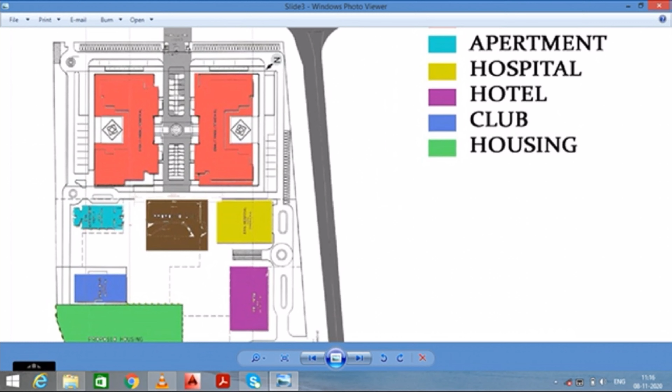All the people want some recreational space near the workplace, so they can break the monotony of work. People can go inside and enjoy, and this auditorium can host drama, dance, and many other activities. So this is the context of the site.

This is how you can show your key plan, and this is a good presentation way to show the key plan of your site as well.

So you can show your presentation like this. Let's go to the next page.

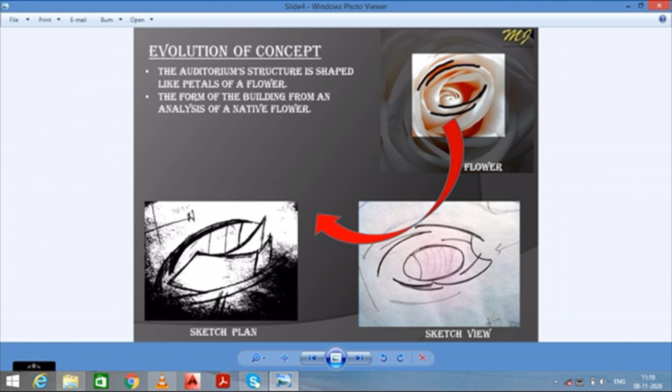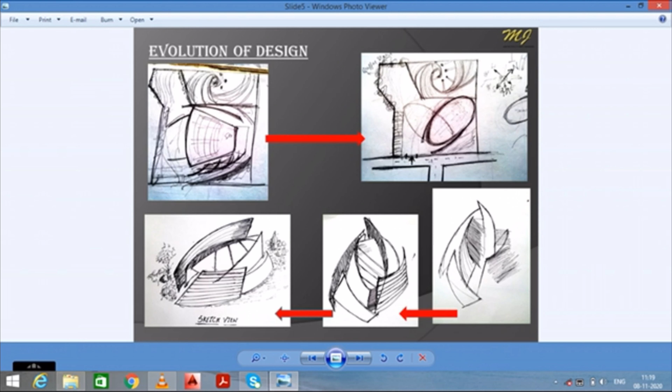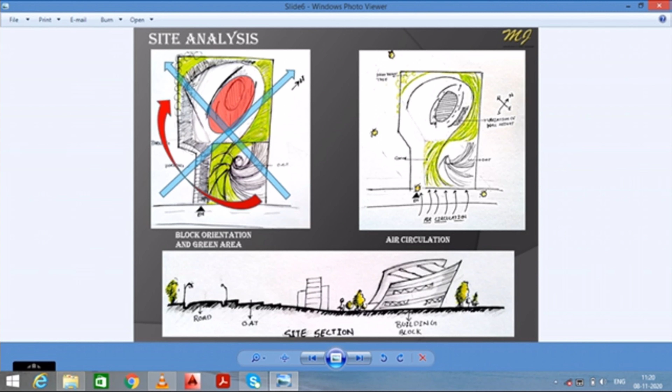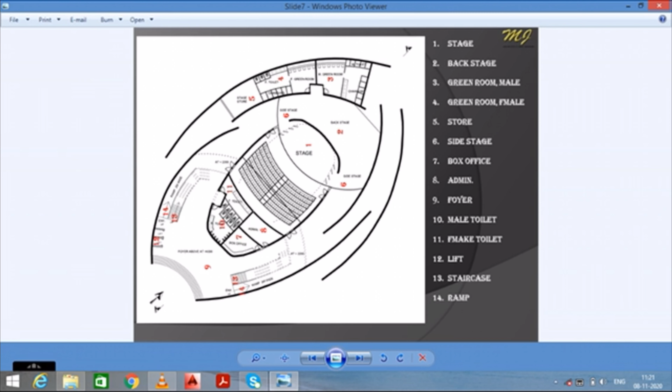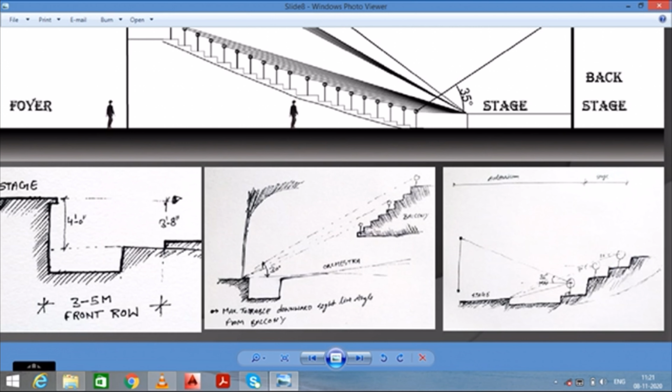So this was my initial presentation that I have done, but the final presentation that I have made, this is the final presentation that I have made basically.

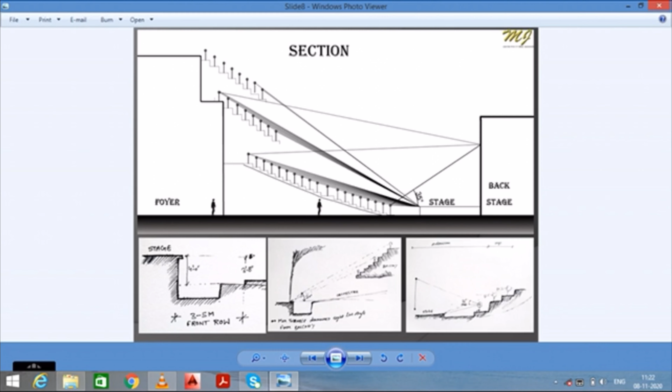So the composition, you can see the composition that I have done. You can take the reference from that, it will help you in your design problem.

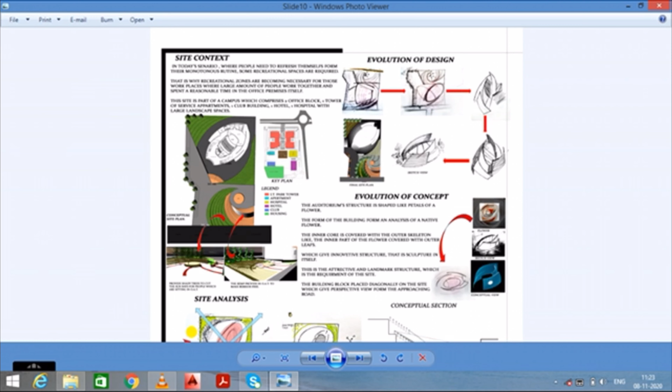So this is basically zone one, where I have put site context with the key plan, site plan, and 2 views. And this is the second zone, evolution of design. So I have kept all my sketches there, and this was the evolution of concept, showing how all these sketches evolve. I have also written some text there, so that you get some clarity.

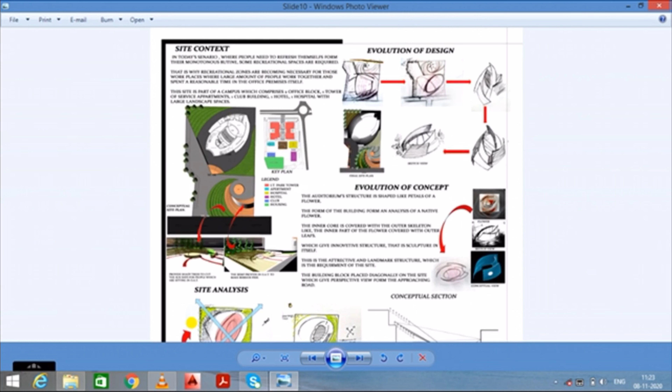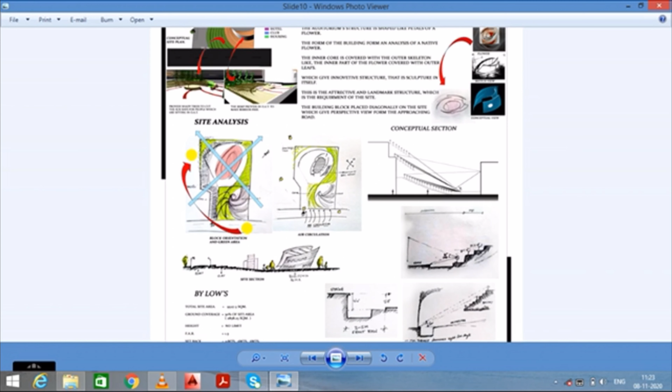So you can see in this photo. So this is the site plan that I have done.

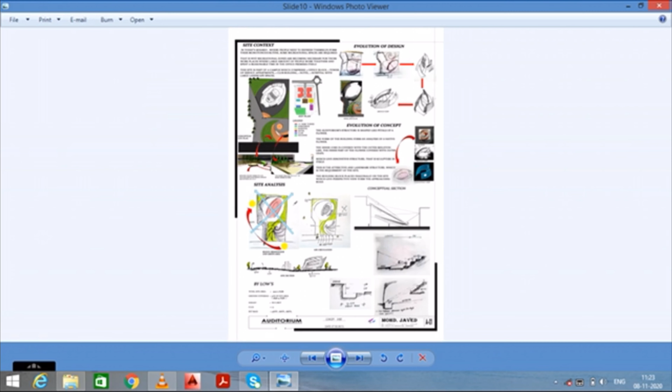This was the final site plan with nice landscaping. This is the entry of my site plan, and at the entry there is the open air theater, with nice landscaping. That is the unique part of my design basically.

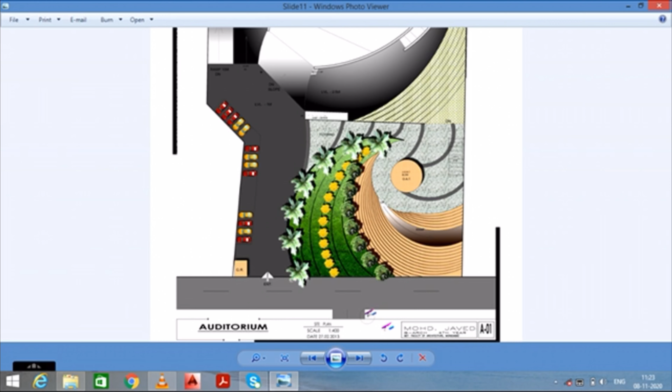You can see guys, this is like a galactic kind of planning, I mean the design basically. So this is one of the unique parts of my design, so that people can enjoy the open space. They can sit there and enjoy the landscaping and the open space. There are a lot of open kind of activities that can take place in this zone, and this is one of the beautiful areas. So this is one of the unique parts of my design, as you can see guys.

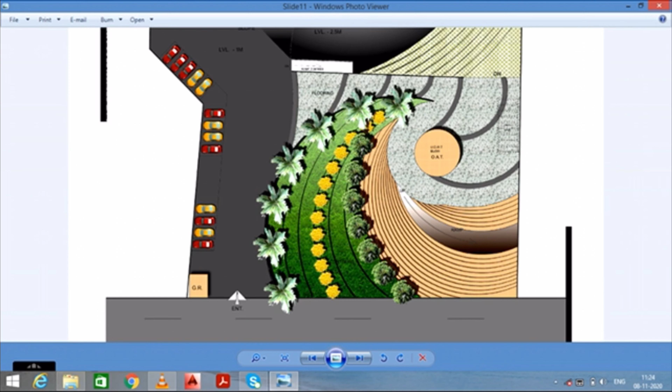So let's come on the next page. This is the final plan that I have drawn, set with all the requirements, with the render. You guys can take the reference of that. I mean, you can do these kinds of presentation that will help you in your design.

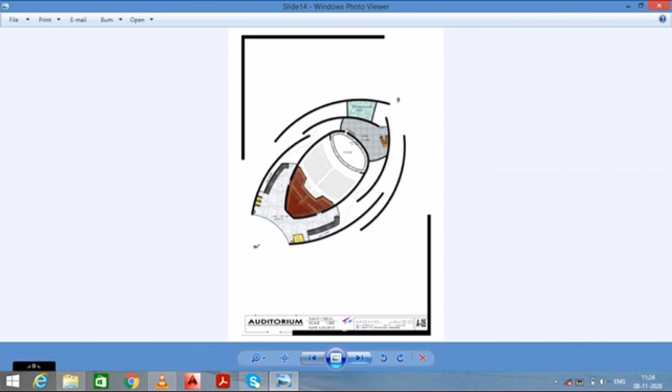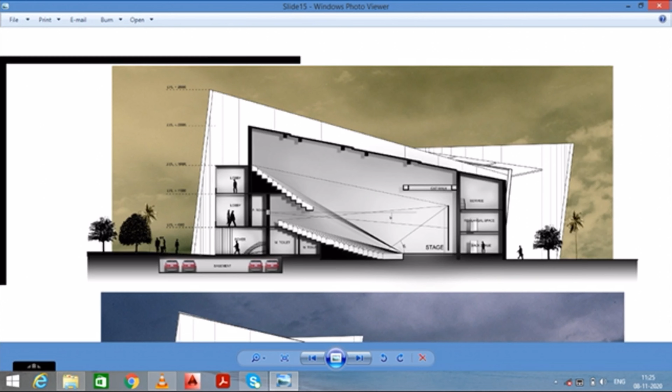So this is the section that I have cut and rendered on Photoshop. This is one of the nice renderings done on Photoshop. So guys, this will help you in your presentation basically. The black and white kind of combination that I have done in the section part is differently visible from the elevation part. The sectional part is this and the elevation part is this, so it's clearly visible.

And this is the views basically. This is the view that I have done on Google SketchUp.

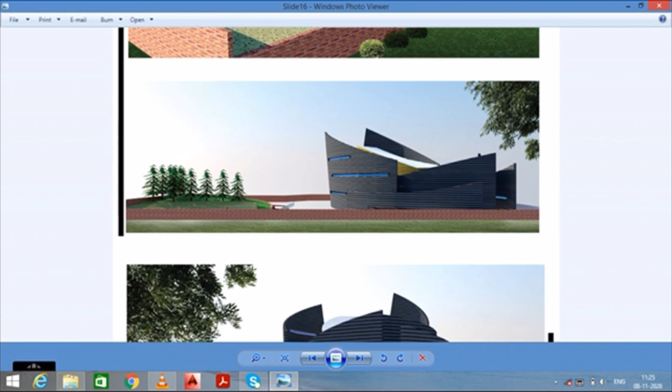So as you can see, the design becomes a little bit unique. So thank you guys, hope you like this presentation, and if you want something else from me and you want some data, just give me a comment in the comment box. I will definitely show you.